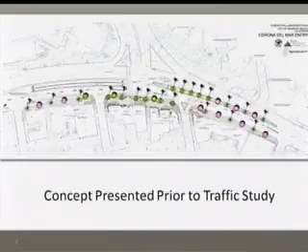Staff met with the Business Improvement District and residents associations in Corona Del Mar to discuss the new concept plans. We presented a conceptual plan with Carnation Avenue kept as two-way traffic, including additional landscaping along Coast Highway and removal of parking on Coast Highway. There was concern about the loss of parking at that location, but both the BID and residents supported the plans for landscaping and increased sidewalk and pedestrian pathway along Coast Highway.

We also presented an alternative that showed Carnation Avenue as a one-way street going southbound. This plan allowed for some additional parking on Carnation Avenue, actually replacing 5 of the 8 parking spaces that would be lost along Coast Highway. One concern raised by the BID with adding that parking on Carnation Avenue under the one-way alternative is that it would impact their ability to have truck deliveries into their businesses along that location. We'd like to further explore that, and we'll discuss it further in the presentation.

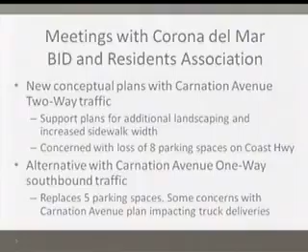This is the concept plan with the landscaping, basically widening the sidewalk into the parking lane, moving the sidewalk an additional 8 feet into the street and taking the parking off the street. We'd be adding landscaping along the highway, widening the sidewalk, creating a pedestrian paseo, with some wider and some narrower sidewalk locations, and palm trees framing the highway. There's also a signage plan allowed right opposite the MacArthur intersection with Coast Highway, and a concrete seat wall framing the landscaping around the sidewalk.

This plan here basically shows no changes to Carnation Avenue. It shows the existing two-way street with rights in and rights out allowed.

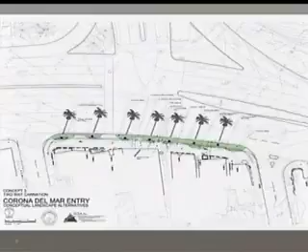This revised concept shows changing Carnation Avenue to one-way only, southbound. It allows for some additional landscaping at the corners of Carnation and Coast Highway, and narrows the pedestrian crossing on Coast Highway at Carnation, making it more pedestrian friendly at that location. One of the concerns with adding the landscaping is that with two-way traffic and cars making the right turn out at Carnation and Coast Highway, there was concern about sight distance, or visibility, for oncoming traffic on Coast Highway. With it only being one way in, there's no longer a concern for that sight distance, so changing it to one-way adds a bit of safety from a traffic standpoint.

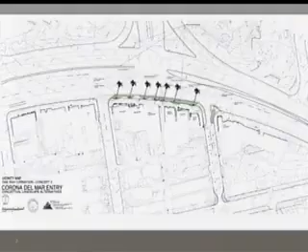As shown here, this is the additional parking. Currently there's only parking on one side of Carnation Avenue. If we change Carnation to one-way going southbound, we'd be able to add parking on both sides of Carnation. This is what the BID brought up as a concern, because they get truck deliveries on Carnation. They were concerned about maintaining those truck deliveries if the road was only one-way with parking on both sides. Again, we'd like to further explore that with the BID representatives.

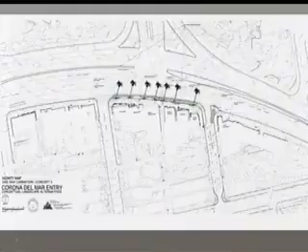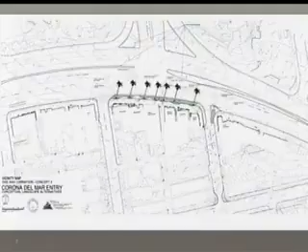Pat: Could you please go back to that? On the east approach of PCH, where we're adjacent to the curb lane, the number 3 lane, how wide is that, do you have any idea? I know we're taking that 8-foot parking lane off. Response: I believe that lane is about 12 feet. That's right in the transition where the lane is being dropped in there, so I believe it's approximately a 12-foot lane between MacArthur and Carnation, the number 3 lane. It looks a little wider than 12 feet because you're right in the transition where the normal lane width, the number 2 and number 3 lanes, are kind of merging together. So it's actually a little bit wider than a standard 12-foot lane. Thank you.

Again, to discuss a bit more the changing of Carnation to one-way between Coast Highway and 4th Avenue, southbound only: some of the reasons for doing that are a relatively low volume of traffic northbound, versus a much higher volume currently on that street going south. So changing it to one-way would not dramatically impact access northbound. Again, it eliminates the concern about sight distance — with the widened sidewalk and landscaping on Coast Highway, there's no sight distance issue for northbound traffic if it's only southbound.

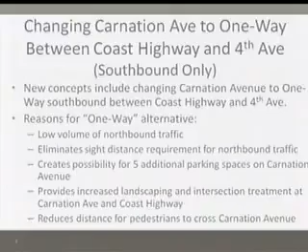This creates a possibility for those 5 additional parking spaces on Carnation Avenue to make up for the lost parking spaces on Coast Highway, and also provides for additional landscaping at the corners, both north and south, where the road will be narrowed to one-way. It also allows for better pedestrian flow, since crossing Carnation at Coast Highway is now a shorter distance, and you wouldn't have that pork chop in the center that you currently have to cross to get from one side of Carnation to the other.

Regarding the replacement of the 8 lost parking spaces on Coast Highway, by changing Carnation to one-way we can make up 5 of those spaces. Another concept presented was to look at adding parking at the old school park site to make up for the rest. We estimated we could provide up to approximately 10 parking spaces by creating a new row of parking, which would impact the park site by removing a little turf area, but we could include some additional parking there.

We would like to include addressing these lost parking spaces in the parking study that is beginning right now, involving both city staff and CDM.

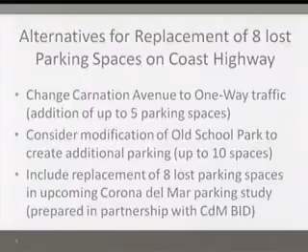In terms of costs for this entry project, staff estimates the final engineering costs would be approximately $50,000. Our estimate for constructing the one-way option on Carnation is $350,000. If the two-way option were chosen, the construction cost would be less since we wouldn't need as much improvement to narrow the corners on both the north and south side. Our estimate for the two-way option was $250,000, and the added landscaping would add approximately $20,000 a year in annual maintenance costs.

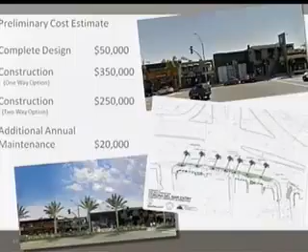At this point, staff's recommendation is for council to direct staff to proceed with Concept 3, the reduced landscaping option, moving the curb out 8 feet, removing the parking on Coast Highway, and adding landscaping and pedestrian improvements. Staff recommends proceeding with the alternative of changing Carnation to one-way southbound between Coast Highway and 4th Avenue, and staff would work with BID representatives to address their concern about truck deliveries on Carnation due to the narrower section and the added street parking.

We would also like to include the discussion about those lost parking spaces in the CdM parking study that will be starting soon.

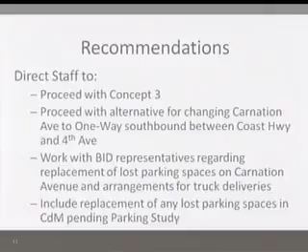Lastly, regarding funding, staff is requesting direction from council to address both the $50,000 design costs for the final engineering of the project, as well as the estimated $350,000 for construction costs associated with this project. That concludes the staff report, and we'd be happy to answer any questions.

Mr. Haddon, or Mr. Hill.

Thank you. With respect to the parking on Carnation, has there been any consideration given—one of the issues or complaints I remember from before was that apartment people would park there all day long—to making those 1-hour spots or anything of that sort? And if so, might part of the delivery issue be that the parking was reserved for deliveries from 6 to 8 a.m. or so, when we would like to schedule deliveries before traffic comes into the area anyway?

Yes, and we haven't finalized exactly what that parking would look like or whether we would include any restrictions. Currently there is one section of curb on Carnation designated for 30-minute only parking, so there is at least a precedent for time-limited parking on the street. But we haven't finalized that plan, and we wanted to work further with the BID regarding their deliveries and whether time restrictions would be a better approach.

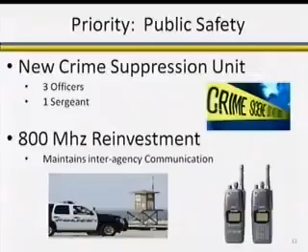So you can see included in this budget is a new crime suppression unit, which includes 3 officers and a sergeant, as well as a reinvestment in our 800 megahertz system. This is a critical investment that will maintain interagency communication, not only within our departments, but within the county-wide system, assuming we have a large-scale emergency.

We're also increasing our investment in IT strategic investments. We're upgrading our enterprise resource planning module as well as computer-aided dispatch, online permitting system, and increasing our presence with web and phone applications.

We're also trying to hit that priority of being a smarter, smaller government. We are continuing to outsource certain applications. We've just completed the transition of our parking lot handover to central parking systems, and we'll continue automation there. We have outsourced our printing, and through IT's hard work, we've reduced the number of personal printers on site to multi-function printers.

We're also trying to shrink the workforce, and in this budget we've reduced the workforce by 16 full-time employees and 14 part-time full-time equivalents. We're increasing employee pension contributions. We've introduced lower-tier benefits to new employees. We're accelerating our payments on our unfunded pension liability, and we're proposing to accelerate payments on our retiree insurance unfunded liability as well.

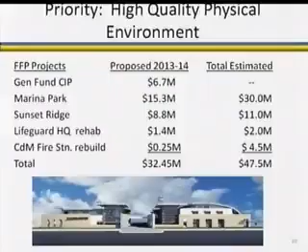Dan, question for you. So with those projects, will we be using reserves to pay for those? You noted we're paying cash.

We are funding our facilities financing fund through general fund cash contributions, developer contributions, as well as interest earnings. So as we ramp up those reserves, we will be paying cash and using our facilities financing reserve for what it was intended to be used for.

Okay, and I may have missed the slide. What are you projecting as far as our reserves for the next year? We'll get to that after the CIP presentation, if that's okay.

Okay, thanks. Yeah, I just want to emphasize the point that our spending for these parks and other capital improvement projects is all cash funded.

And Mr. Mayor, while Mr. Webb sets up, I know I've beat this drum before.

Dan kind of glossed over the fact that we are accelerating payments to our unfunded liabilities. I would like to make it clear to the public that by virtue of the actions of this council, we have set forth a strategy to pay off our current unfunded liability in a realized, certain time. We must be one of the only cities in Orange County that has taken that strategy and has the wherewithal to do that. So that shouldn't be lost on the public as we move forward with this ambitious capital plan.

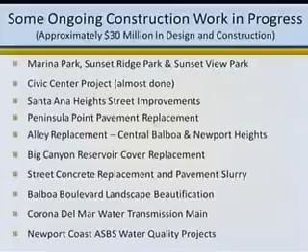The good news is, as we come into this new year, we are improving. Our neighborhoods are being beautified, more parks are underway, and our pavement condition index is improving. We're back to putting $5 million from the general fund into the CIP, and we're making investments in the harbor. The signal synchronization is just about done—we've spent a lot of time on that, and this should be the last year. So we're seeing a lot of significant improvements in council goals.

With that, we move into this year's projects. For the audience watching at home, I wanted to explain how projects are selected. We have a series of master plans we go to: a facility financing plan that looks at our buildings, fire stations, parks, and large facility items; a pavement management plan that tracks our pavement indexes and guides what projects we should be spending money on next; a water master plan and sewer master plan that look at the age of our pipes and facilities and plug in capital and maintenance projects; and we recently completed a Tidelands capital plan that's helping program projects for our harbor and Tidelands areas.

Projects are also coming out of the council. We have priorities delivered by council, and we get projects out of that. Council also identifies certain projects, or the community or staff will identify projects. And some projects are actually required by federal law, state law, and even legal actions—like we've had some ADA work recently.

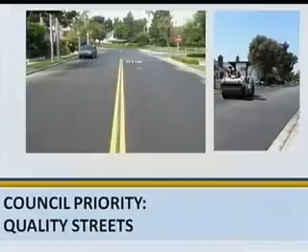Under streets, we have basically street and drainage. There's $18 million programmed this year. $8.3 million is in the arterial areas, the large streets. Another $6.2 million is in our local street system. We have $2.8 million going into landscaping and street landscape this year, and then there's a small amount, $0.7 million in drainage.

Of that $8.3 million, how much is leveraged with OCTA or other funds? Is that all ours? It's not all ours, I don't have a number, but we typically have a significant portion of that in grants. Can we get that for later? Maybe next time, I can show it in the pie chart. Thank you.

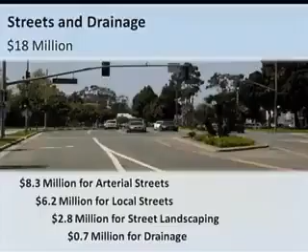We try to project out many years for utilities purposes. We share this with Southern California Edison and the gas company to try to get them to think ahead and put their utilities in before we start paving streets.

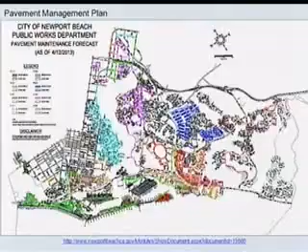I think we've been doing a lot of work in there. You want to keep your pavement probably at 80, 82, no more than that. That's probably the excellent range, and you're not spending money just to keep up a good street—you're doing good value engineering on that.

I think it's really noteworthy that the overall index increase is really entirely due to improvement in residential streets maintenance, so it's nice to see that for the residents. And we look to do more of that. You'll notice our arterials are in pretty good shape, so we're going to probably do less arterial work in the coming years and try to keep focusing on those residential streets to bring those up.

Dave, where is our ranking within the context of the county? Because someone could see 80 and say, oh, you got a B, but what is really the significance around 80 and 85, and where is that within the county? It's relatively high, I can't tell you exactly—I didn't look at all the county. They do that once in a while with OCTA. We were in the top group, but OCTA now requires all the cities try to get above 75, so they're all trying to push up to that using their Measure M funds. I can get the exact number if you'd like later.

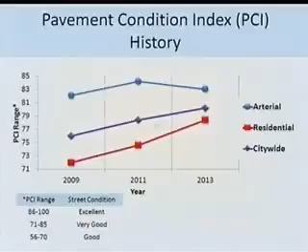When we talk about pavement, I thought I'd take a little detour here to give a little Pavement 101 course, because some people aren't familiar with some of the things we do. There are several ways we maintain our pavement, and you'll see sometimes you just go out and there's a bunch of black squiggly lines on it.

It rejuvenates the wearing course. It seals the pavement so we keep the wear and the water out of the pavement and extends the life of that. This type of treatment runs usually about 23 cents a square foot all in. That's just kind of a base. We do this about every 7 years. We've got our city now on a 7-year program. It's recommended every 7 to 10 years. We're in the 5th year of our 7-year program. We started that 5 years ago, and it's been real successful. The residents have really given us some great feedback on getting their streets refreshed.

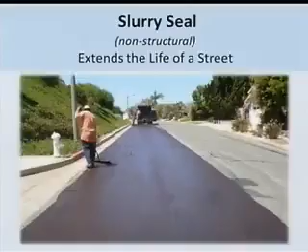We come in and do the striping and everything at the same time. The next level would be more of a structural level, and this is what we call a grind and overlay. We usually grind off about 2 inches of asphalt and put a new wearing course back. It actually adds the structure to the pavement. This is more significant. This is about $1.80 a square foot, just to give you a relevant figure compared to slurry.

Dave, I've heard that there's blacktop, or whatever you call it. I call it blacktop because it's always black when you put it on. But there are materials that are lighter in color because our streets are one of the major sources of heat islands. Is it much more expensive to put the lighter color material on? Does it not wear as well? I'm just wondering why we don't consider that.

There is concrete, which is obviously a lighter color. I haven't seen too much in terms of asphalt. You could get an aggregate which would lighten it up. We haven't really specified that. It might cause a little extra cost because they'd have to go find that lighter aggregate. I don't know of a material like a dye or anything you can put in there. There are some paints and things you can put on asphalt, but you're kind of limited with that. We do use a rubberized asphalt, which tends to be a little darker, and the residents like that. It actually uses recycled tires and rubber, and we use that on our arterials.

So we get points for recycling, meanwhile the temperature soars. Yes.

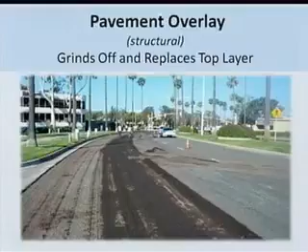The last item we have is complete reconstruction, and that's where we'll completely take the pavement out, the base out, and rebuild the street. This is the last thing we want to do. This is very expensive. This typically runs for an asphalt street about $5.50 a square foot. If we're in our concrete streets, we've been getting prices for about $7.20 a square foot all in. The difference being in the value we're finding on the concrete side, which is a lighter pavement. The asphalt streets last for about 15 to 20 years before we have to grind and overlay them again and do substantial reconstruction. A concrete street can last 60, 80 years. We have some probably approaching 100 years. So you get much more value for when you rebuild the street with concrete.

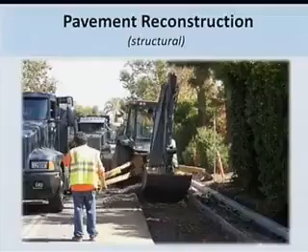Is it very, very difficult when you have an asphalt street to take it out and put the concrete in, or is it the same process, except you're pouring concrete instead? It's the removal that's the same challenge, taking it out. Putting it back, there's more curing time and more downtime on concrete, so doing an arterial, for instance, you probably don't have the luxury of that much time to take it out of play. Maybe a residential street might make good sense if we're going to take all the asphalt. Have we ever done cost projections? Just say, hey, it's more up front, but if it can last 50 years... when they start cracking, they don't necessarily look so good, but have we ever done that?

We actually have, in fact, a lot of our streets going back in are concrete right now. We have Peninsula Point, where we're taking out concrete streets. We haven't taken out too many asphalt streets, but we are in the process of taking out concrete, and we are putting concrete back because the value is good right now. So we're not taking concrete out and putting asphalt in, we're replacing the concrete with concrete. But we're not adding concrete where we haven't had it before. Not currently, but there are some alleys and things—we're taking out the asphalt alleys and putting concrete back in there.

Okay, thanks. What was your concrete price per square foot? Right now, we're getting about $7.20. That's complete with removal and replacement and all the work around it. So it's probably the lowest I've seen it in quite some time.

In our arterial class of streets, we have several major projects going on. Newport Boulevard at 32nd Street is our first one. This is a long-term project where we're looking to add a third lane and bike lanes along Newport Boulevard, right in front of the old City Hall site.

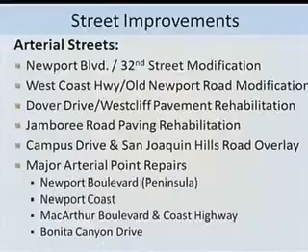You changed your terminology a little bit from when you did your paving 101. A modification is where we're changing the configuration of a street. That may involve paving as well — we may be doing some spot widening, lane channelization modifications, and it usually involves some paving.

But rehabilitation wasn't on your paving 101 slide — what do I assume rehabilitation means when I'm looking at this slide? We're going to basically be grinding and overlaying the existing street. When the sewer goes in, they'll patch back and we'll have an asphalt patch. We'll need to take out some medians and curb and gutter concrete. So we're not doing complete reconstruction, but we will be grinding and overlaying and then restriping. I apologize for the difference in terminology there.

As we move into our residential program, there's quite a lot of opportunity here for improvement too. We have residential street overlays — several of those going on. We'll be doing our annual slurry program again, that's the Newport Heights area.

Park Avenue Bridge over the Grand Canal is also in here. We're doing the design right now, and we're looking to get that programmed and get construction started as soon as we can.

Concrete pavement reconstruction — we have several streets where, again, we'll be taking out the existing pavement and putting concrete streets back in place. The annual sidewalk and curb and gutter program usually goes in our fall program where we try to get ahead of our slurry. This again took place in West Newport and will be heading to Newport Heights next year.

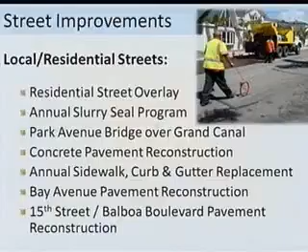On the slurry coating, it seems the slurry coating is moving ahead rapidly but the striping is not following behind — is there some reason for that? Sometimes they'll cat track, and I know that there can be a little gap there.

They have two contractors come in. We make them put tabs down, and we make them cat track it so you can see it. It shouldn't be too far behind it, and I could look at any street that looks like that.

I know 32nd Street, I think we're waiting on right now. No, you started on that today. That was being done today, yeah. In fact, there are about 6 different lines on it right now.

But I noticed some of the other streets, the numbered streets, were slurried, maybe a week ago, and there's been no striping. That's probably the extent they would do. They want to get enough there that the striper can come in and actually put the permanent striping down.

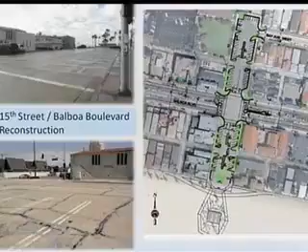If I could take a minute to go off in a different direction with 15th Street and Balboa. I wanted to put this out to council. This is something we'd like to add to our program this year. In those pictures, you can see, particularly on the bottom one, 15th Street is a 100-foot wide right-of-way. It has commercial around it here, and it crosses Balboa. This street's in relatively poor shape for the concrete in that area.

We recently did the undergrounding project and cut through here on the alley towards the ocean front, and we replaced some of the concrete pavement there. But we wanted to look at this on a more holistic level. There's a lot of concrete here, we need to replace it. We thought maybe we'd want to try something where we add some landscaping in this commercial district.

So you see a plan on the screen that basically highlights some areas. We think we can maybe, by putting some landscaping in, maybe bulb out. Oh, by the way, the signal in this location is also old and needs replacement. They told me that a couple of years ago, and I said, why don't we just hold off on replacing that until we can look at the whole area. So we need to replace the signal.

We need to replace the pavement in here. It might be a good opportunity to do some bulb outs, some landscaping, some channelization of our parking, and maybe even get to the point where, going down towards the restroom on the beach, we could add kind of a turnaround.

There's a couple benefits out of that. I think we can increase the parking number by a couple, maybe 3 or 4 just on this. We could probably sharpen our pencils and get a little bit more. We could add some greenery and maybe revitalize this area. It is part of the end of our revitalization that we've been working on the peninsula.

We also could probably add a turnaround right at the restroom there, which might help with some of the problems we have at Newport Elementary, where the cars stop on Balboa Boulevard. There's a lot of drop-off and pick-up there, and if we can get some of the schools to drop off here and walk the block, we might be able to resolve some of those issues too.

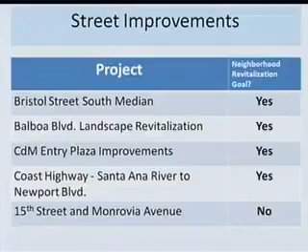Another goal for the council has been bikeway signals, making the city more pedestrian-friendly. This is an important program we're also looking at putting a lot of funds into—we're looking at putting $3.1 million into our traffic, ped, and bike facilities. This includes the East Bluff bike lanes, which are currently under design. We're hoping to get those started relatively soon, ideally over the summer when the kids are out.

Traffic signal rehabilitation—we're constantly working on our signals; we need to rehab about 2 or 3 a year. Bayside Cove walkway is in here too; the plans are being done, and we're looking to start this right after Labor Day.

And then we'll be taking on the East Coast Highway signal rehabilitation. Those plans are actually under design. These are signals we inherited from Caltrans, and they're sorely in need of improvements—the wiring's going, the fixtures are going. So we hope to do several of these signals next year on the construction side.

Signal modernization—we have two phases left, 6 and 8, and they'll be starting this fiscal year, which will complete our signalization modernization project.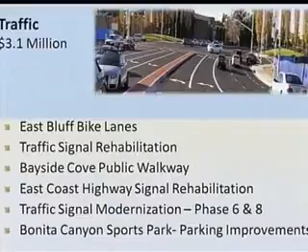Dave, is there any chance—I know we're working on the acquisition of Newport Boulevard there, just beyond the Arches Bridge—any chance to sneak in those traffic lights in terms of synchronization and modernization? Actually, I have some really good news for you on that. Pat Thomas just got the email today that the CTC has approved it, and they're processing the resolution. Once the resolution is filed, you'll be the new owners of .17 miles of street. That should happen in the next week.

That'll give us the rights to go through. I know Brad Sommers has already looked at ways to get those signals up and running and coordinate them for the summer, so we'll need to do some work there. We'll probably come back when we do the Newport Boulevard widening to do a complete rehab of each signal, but we can have a stopgap plan in place to get synchronization going sooner. They have a plan, figuring out a way. They have to get into the cabinets, but they think they can start wiring them together and having them talk to each other.

Dave, from where to where is the East Coast Highway signal rehab going to take place? It starts at MacArthur and goes all the way out to Newport Coast. There are a couple signals in there, for instance Marguerite was just done. Most of the signals along there, like Poppy, Hazel, Cameo Shores, will be rewired with new heads, new hardware, anything that's worn out. Sometimes we need new poles. Some will be done where they have center poles—Caltrans used to like the old center pole—so we take that pole out and put in a new arm to get rid of that.

One question I get from people is that when we replace or rehab these signals and put in new control equipment, the signal boxes seem to get bigger, which seems counterintuitive since many are going from mechanical to solid-state devices. Do you have any comment on that? You're correct that some have been getting bigger as more technology is added. The other addition is battery backups—they used to hang them on the back of the cabinet, and sometimes you'll see a cabinet with a little bulge out the back. Now they're putting that inside, so some cabinets have gotten bigger. We've been talking to our traffic folks about whether we can get those smaller and add a little more beautification. So it's been noted, though I don't know how much we can move in that direction.

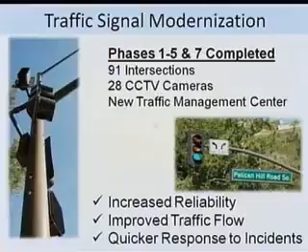These are the last 2 phases I've talked about, and they're looking to start construction in spring of 2014, and also fall of 2014, to finish the last 2 phases.

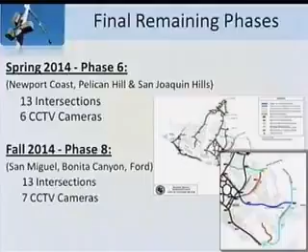So with that, we move to another area: parks, harbors, and beaches. We have a lot of projects, including Tidelands projects at $1.9 million, and about $1 million worth of pier improvements. We have beach sand management again and minor dredging. The minor dredging is basically a couple things - there are some spot dredgings, but this will start the Semeniuk Slough and Grand Canal efforts. We're trying to dredge both of those.

I think there's a way we might be able to do the Grand Canal under our new RGP permit, so we're trying to include that. There's testing and things to start on the Semeniuk Slough, so we've got money in there for that. We're also working on our waste pump-out systems in the harbor, and since this was printed, I've been informed 3 of them are done. There's 2 left - a couple weeks from now they should be done on that project. Again, I apologize, this is a snapshot, so when we put the budget together, some of these things are in process.

We do need to look at our ocean piers this year. Tony has a question - Dave, could I get you to clarify?

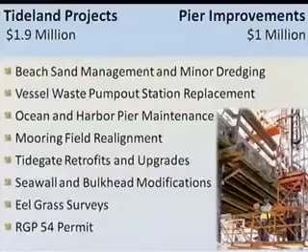We're going to talk more about that at your meeting on the 28th, where we'll show you the estimated increment and how that's set aside and goes into some of these projects, especially the capital side. So you are operating as if State Lands Commission was on board with our allocation? Yes. But with the expectation that this budget year doesn't start until July 1st. Understood.

Several significant park projects we hope to get going this year. Two of them are well into the process. We're hoping for our coastal permits on Marina Park and Sunset Ridge. I'd like to surely start Marina Park right after Labor Day if we get our permits. Sunset Ridge is a little further behind, but it is proceeding through the process. We have 3 other parks that we'll be adding this year to start the process.

Wait, let me get this straight, because I have these backwards. We're still waiting for the permit for Marina Park, even though it's been approved. I thought we had the permit issued for Sunset Ridge. Is that not correct? Neither park has their permit yet. They've both been approved by the commission, and now we're going through the staff process to have the plans approved and all the conditions met before they actually issue the permit. Didn't we get the letter on Marina Park that the permit was in the mail? I thought it was in the mail. It's still apparently something the mail is slow on.

Correct us all if we're wrong. I thought I remember an email saying it's on its way. Well, we did get our notice of intent to issue the permit. So the first thing they do after the commission action is issue a notice of intent to issue a permit, then they go through and issue the permit after. That basically shows you here's all the conditions, here's what we've agreed upon, you need to meet this -- part of that is we want a complete set of plans to review and approve, a parking study, a coyote study, and then they'll check those off and issue the permit. So we're close, I hope.

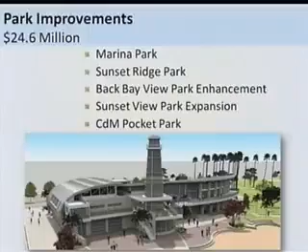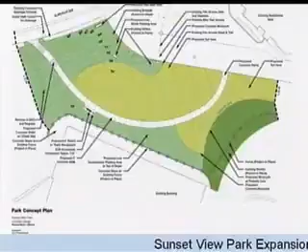Just recently, the opportunity came forward to actually obtain the property. The owner has agreed to donate the land to the city. This has been presented to the Corona Del Mar Business Improvement District, and the board voted to support the project. It was also presented to the Corona Del Mar Residents Association Board of Directors at their annual meeting and was received with enthusiasm from those groups, so we're asking that it be funded in this year's capital improvement program.

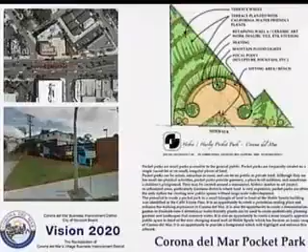So with that, we've added $90,000. We believe we can get that park built once we get clearance on it. It's not in the coastal zone, so it'll be moving rather quickly.

Our next category is water quality and environmental, with $4.9 million. We're looking to do habitat vegetation, trail modifications, and basically improve that local area. This would be the Big Canyon area downstream of Jamboree Road heading into the bay. We also have money in here for the Newport Coast ASBS Protection Program.

This is an area of special biological significance, or ASBS, off the coast just outside of Little Corona, going down south towards Crystal Cove. We have certain things we have to do to meet the ocean plan requirements on this.

The Santa Ana Delhi project has money in here from a settlement that improves the Santa Ana Delhi channel. This is a channel coming out of Costa Mesa and Santa Ana that comes into the upper Newport Bay. We're looking to do some kind of trash collection system, maybe a low-flow diversion that takes out some of the low-flow oils and metals in the stream coming into the bay.

Our last program here is the Municipal Water District of Orange County program, with an irrigation replacement and water reduction program. We originally had a program for about $1 million: $750,000 came from the state, the city put up $150,000, and IRWD put up $150,000 to do retrofits on controller systems and sprinkler heads to reduce runoff. We got rebates from the state and from MWDOC in the amount of $70,000, and council gave us direction to reprogram that into the budget, which is what you see here.

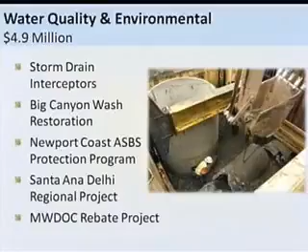We use as much as we can out of that. They draw it down and continually put it into the system, but there is a portion at the bottom that we can't use. Okay, but we didn't just open the spigot for all of it. No, we use it to relieve the system. Thank you.

So we do have some improvements to our water system also, not a whole lot of money this year, $2.6 million. We're doing some work on Newport Boulevard in advance of the modification project. We need to replace fittings and valves and some other work, maybe line some mains in there. We have some cathodic protection we need to do to keep our metal water mains in good shape. We have some aging cast iron mains that need to be replaced. This is an ongoing master plan project.

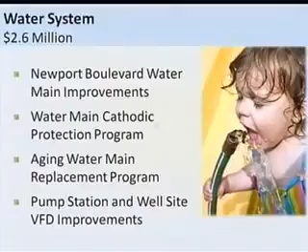And then we have a pump station and well upgrade. These are variable speed drives that we put in, and they're actually helping with energy efficiency. They reduce the consumption of electricity by quite a bit, so we're looking to put those improvements in place.

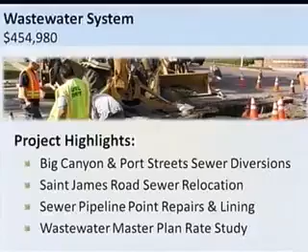Under the wastewater system, a very minor amount of money, about $450,000 in this category. We have some diversions up in the port streets, which help with our selenium problem over in that area. We have a sewer in the St. James Road area that we need to relocate; it's on the mid-slope, and we want to get it out of the slope and address that. We do some point repairs every year, finding little settlements and breaks in the pipe that we have to take care of. And we're looking at additional efforts in our wastewater master plan rate study that will be coming through.

And then we have one last class, our miscellaneous class. Not a lot of money in here. There's some rebudget money for our local coastal program, and also we're carrying a little money forward for buying Rule 20A credits. I would note that I did get contacted by a city that we found another $80,000 in credits, so we'll be looking to purchase those soon and add to our pot to help start the undergrounding on Balboa Boulevard.

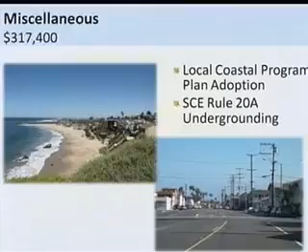With that, we come to our summary slide. This is a snapshot of our overall CIP, all the various categories there, and the rebudgets and budgets. $61 million is the total that we'll be looking to program this year.

And a little different picture of that, how it breaks down. I'm looking at grants, contributions. Councilmember Petros, you asked about the arterials - a lot of that is under grants. 24% of our budget is basically coming out of that. We also get, in our road program, most of it comes out of OCTA under Measure M Competitive.

Another way to look at our budget breakdown here, if you're interested - again, $61 million in the different programs and how it breaks down.

Where does, Dave - going back to the funding by source slide - does all the park fee money we get, is that in the master facilities master plan segment? Is that where that money is at? Yes, for like the big parks, it'd be in the master facilities. That's where all the park fees go? Right. Okay, thanks.

With that, again, the good news that we see in our budget, we are improving our neighborhoods. They're being beautified, we've got more parks underway. There's several underway, hopefully construction soon, and others in the pipeline to start construction. Our pavement index has been improving. We're heading towards council's goal of a citywide average of 80. We're putting $5 million of general fund investment back into the program, which is helping us move forward on a lot of these efforts. We're starting to do much more investment in the harbor. And again, the synchronization of our signals is just about complete. We're looking forward to completing that effort.

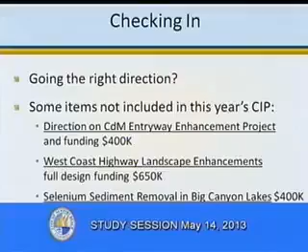We're only halfway down the page, too. The next one here is another item we've been addressing. The regional board has a TMDL on selenium, and it affects the Big Canyon watershed. We did a lot of testing a couple years ago. We worked with the board on this. We're trying to knock down the levels of selenium. Selenium is a naturally occurring element in this formation out there, and the irrigation water and other things are picking up the selenium and moving it downstream.

One of the identified goals was to remove the sediments in the Big Canyon Golf Course lakes. There are 4 lakes in there. The sediments have built up over the years. There's a lot of selenium sitting in there, which turns to selenite, which is the problem. The recommendation is to remove those sediments as we move forward.

It's about $400,000. Big Canyon has talked to us, and they said they're interested in going half on one of the lakes because it's more of an aesthetic issue with them, but the rest of the lakes are really nothing of their concern, so they're willing to work with the city, but we'd have to pay the cost on that.

So is this the net or the gross for all that, for that project? The gross, as I understand.

Okay. Do we feel that this is the major source? We've done enough testing to say we're pretty sure this is where it's coming from, most of it? We know that this is a source. I don't know if it's the major. It's because a lot of it's being resuspended out of the lake.

But we also have some other things. We're trying to do the diversions upstream. We have some hot spots coming out of the port street, so if we can divert that flow, that'll take care of a portion of it. If we take care of the lakes, we think we'll knock it down to a level so when it gets down to the lower portion, which is below Jamboree and where we're trying to do some work down there, it'll be at a level that's not a concern to the regional board.

Well, I think the project started with one lake, Lake 4, which is a water hazard on the 4th hole at the country club, and they were motivated to have it dredged because of aesthetic reasons, the shallow water and the algae growth. It kind of looked bad, smelled bad, kind of a thing.

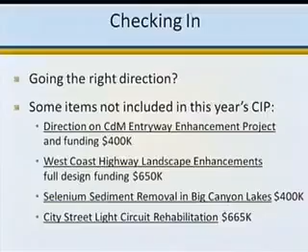So with that, I conclude on that, unless there's any other questions or items we didn't catch on items that didn't get funded. Any other questions for staff? Mr. Petros? When we were in our Finance Committee meeting, Dave, I raised the question that I'm in the enviable position that I get to plan, but you get to do. And you've heard it from the dais already, the number of things that we'd like to see done.

What would you characterize as the primary barrier to these rebudgets? Is it permitting? Is it the lack of professional staff to advance projects? How can this council help you get more of these things done? Because if it's something within our control, a finite resource you just don't have enough of, I would much rather see us achieve these ends than have to rebudget because we're trying to hold the line on contract consultants or professional staff.

To answer that question fairly, I think permitting would be our biggest hurdle. The council's been very fair. We have plenty of money to do the projects. You provide us with excellent consultants and contract administrators to do this. I'm blessed to have a wonderful staff, a lot of great talent. We basically do the meat and potatoes stuff, and we put out all the special stuff to consultants.

But as I've seen, particularly the coastal permits is where we've really gotten hung up, and I'm embarrassed that the two big projects we want to advance are stuck in the coastal process. A lot of our stuff is regulatory driven. Caltrans can be another hurdle at times. So anything we can do there, probably your efforts — you've already given us direction to process our own local coastal plan — would help immensely in smaller projects, like for instance the Corona Del Mar entry project, where it would be done internally and we wouldn't end up at the Coastal Commission. Those are the two biggest hurdles I think we could address.